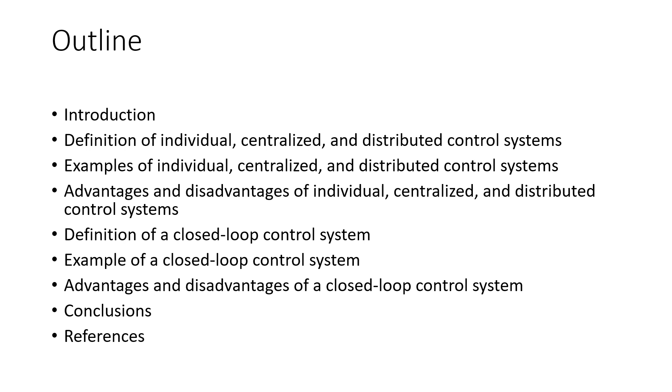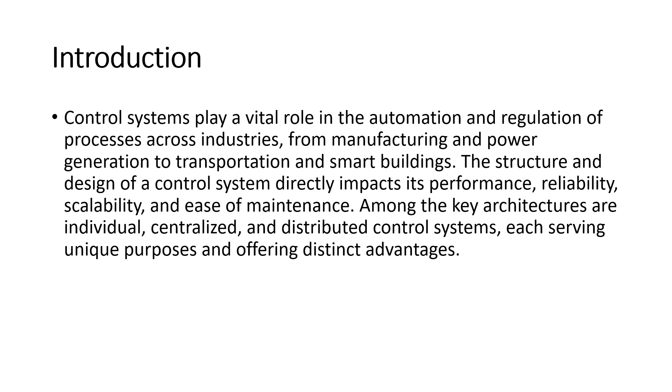So, control systems play a vital role in the automation and regulation of processes across industries, from manufacturing and power generation to transportation and smart buildings. The structure and design of a control system directly impacts its performance, reliability, scalability, and ease of maintenance. Among the key architectures are individual, centralized, and distributed control systems, each serving unique purposes and offering distinct advantages.

Control systems architectures. We're going to be focusing on three, which are number one, individual control systems, and then we're going to talk about centralized control systems, and then third, we're going to be talking about distributed control systems, or DCS.

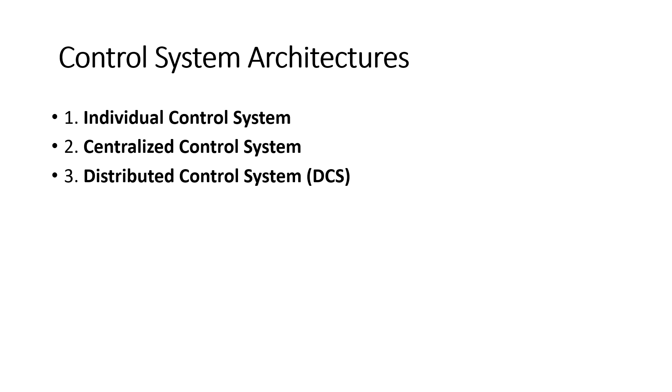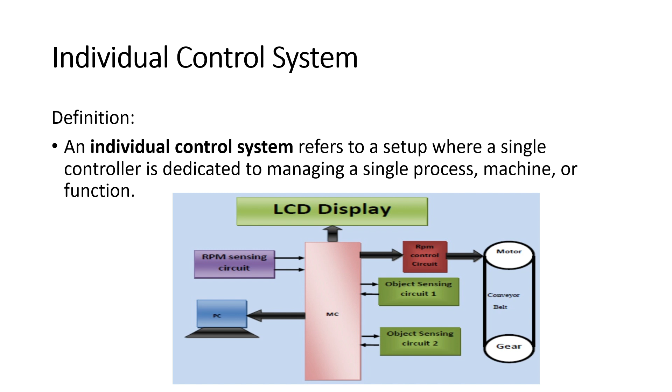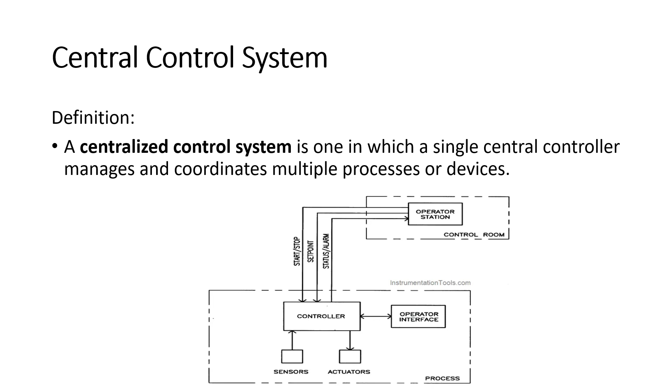product to be processed, and then after that, one process is done, another conveyor will probably send the product to a destination where that product is going to go through the final stages, whether it be put on a pallet or put into some type of container and be ready to be shipped or distributed.

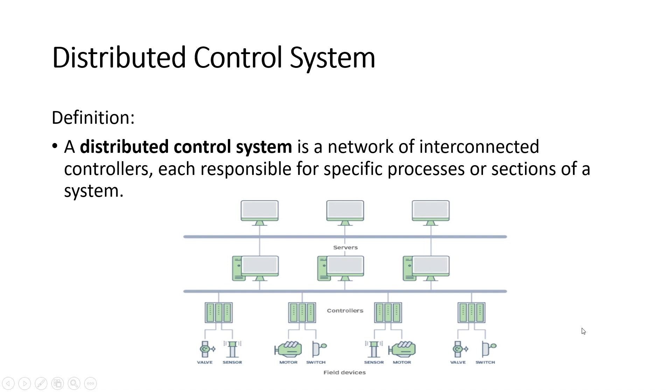So the advantages and disadvantages of individual control systems. The advantages are the simplicity: the system is easy to design, understand, and troubleshoot. Cost effective for small systems, fewer components, and no network requirements. Another advantage is reduced risk of total system failure. A fault in one controller doesn't affect others.

The disadvantages of individual control systems are the lack of coordination. No communication between devices can lead to inefficiencies. Scalability issues: difficult to expand or integrate into larger systems. Redundant resources: each unit may duplicate control and monitoring resources.

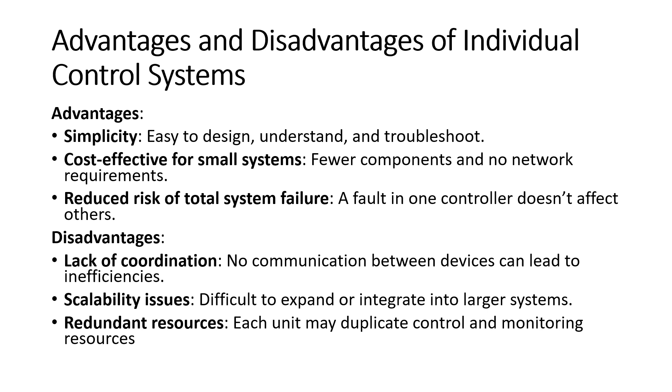So now we're going to be talking about the advantages and disadvantages of centralized control systems. The advantages are centralized monitoring and decision making, easier to manage the whole system from one location; efficient coordination, meaning all parts of the system are synchronized; and simplified maintenance, one system to update or troubleshoot.

Disadvantages are single point of failure. If the central controller fails, the entire system goes down. Another disadvantage is high communication load, referring to all field devices must communicate with the central unit. And another disadvantage is less responsive to local disturbances, delay in reacting to site-specific problems.

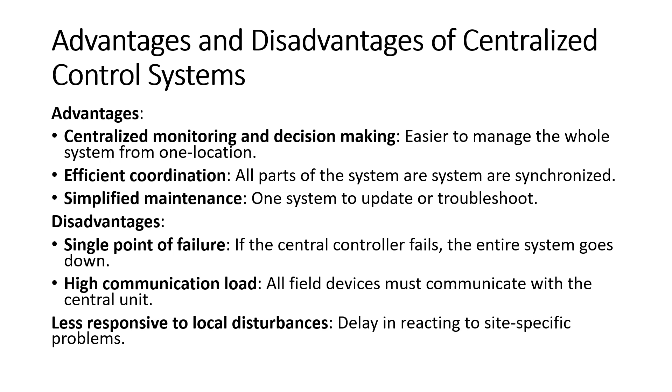Next, we're going to be talking about the advantages and disadvantages of distributed control systems. The advantages are high reliability. Failure in one node usually doesn't affect the whole system. The scalability is another advantage. Easy to expand by adding more controllers. Another advantage is faster local responses. Local control loops handle issues more quickly.

The disadvantages are higher initial cost. Dealing with more components and communication setup will lead to higher costs. Another disadvantage is the complex design and maintenance. Well, these systems will require trained personnel and documentation. And another disadvantage is network dependency. System performance depends on communication infrastructure, which is a disadvantage because if there's a problem with communication or the network, that is going to cause the whole process to stall or the whole system to fail.

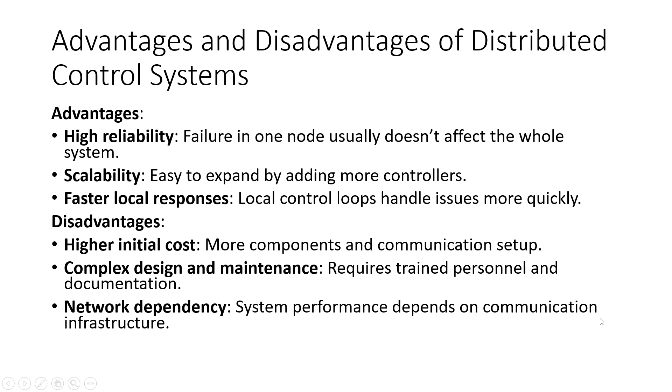So now we're talking about closed loop control systems. By definition, a closed loop control system is a type of control system that automatically adjusts its output based on feedback from the actual output of the system.

Here we have a continuous process where the input is given and the valve is creating the right temperature, and then given the tank, which needs to be heated at a certain temperature to complete the process. And then we have a pressure thermometer that's making sure that all the pressure is right in the system. If not, it's giving feedback to stop the process, or giving some type of input to the system on what's going on.

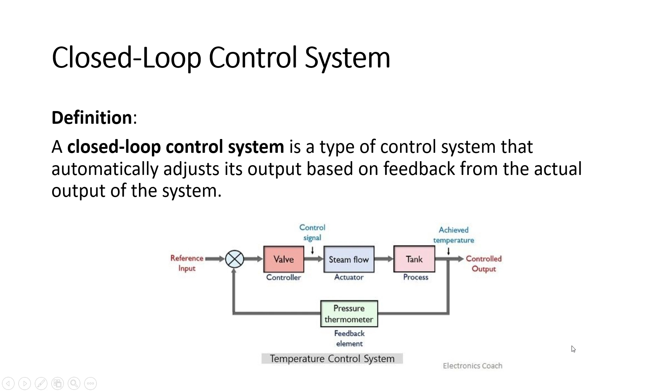So some advantages and disadvantages of a closed loop control system are: the advantages are automatic error correction, continuously adjust the output to reduce the difference between the actual and desired values. Another advantage is high accuracy and stability, which means it maintains consistent performance even under changing conditions or external disturbances. Another advantage is improved reliability, less affected by variations in load, environment, and system wear over time.

Another advantage is self-compensating, automatically compensate for system changes or faults within limits. Talking about like the speed, the temperature, and pressure, so it automatically adjusts to the type of errors that it might see to give a better performance. Another advantage is better performance in complex systems. They can manage multi-variable and dynamic systems with precision. Talking about like robots and industrial automation.

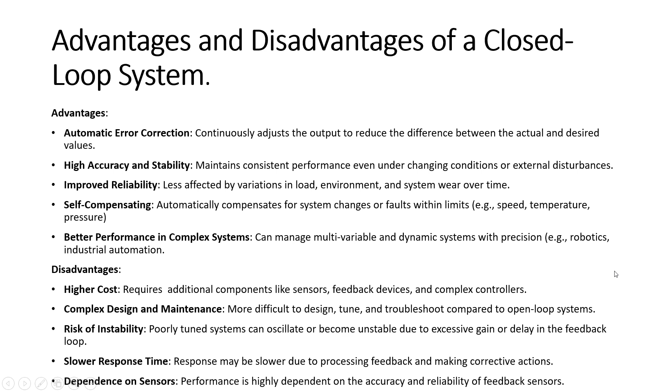In conclusion, control systems are essential in managing and automating industrial and commercial processes. Three primary types of control system architectures are individual, centralized, and distributed control systems, each with distinct characteristics and applications. An individual control system uses a standalone controller to manage a single process or device, making it ideal for simple, independent operations. A centralized control system relies on one controller to oversee multiple processes, enabling coordinated control but posing risks if the central unit fails.

A distributed control system spreads control across multiple interconnected controllers, enhancing flexibility, fault tolerance, and scalability for complex environments. Choosing the right architecture depends on factors such as system complexity, reliability requirements, and scalability needs. Understanding these systems ensures the design of efficient, robust, and cost-effective automation solutions.

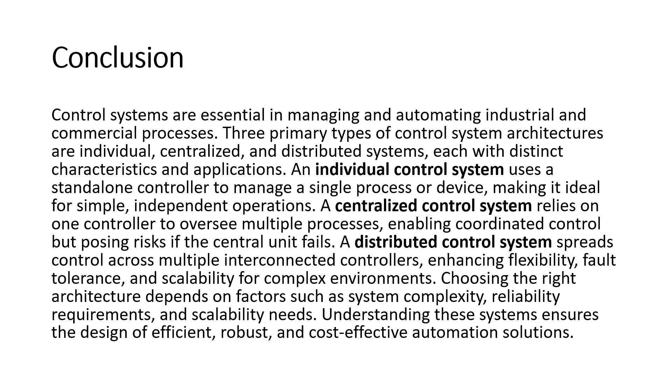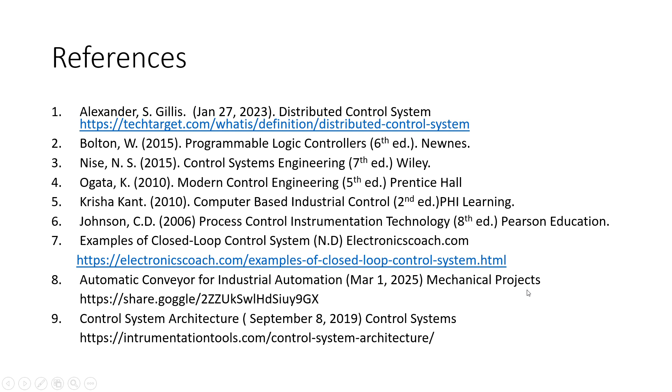So thank you for your time. And today we were talking about the use of individual, centralized, and distributed control systems.